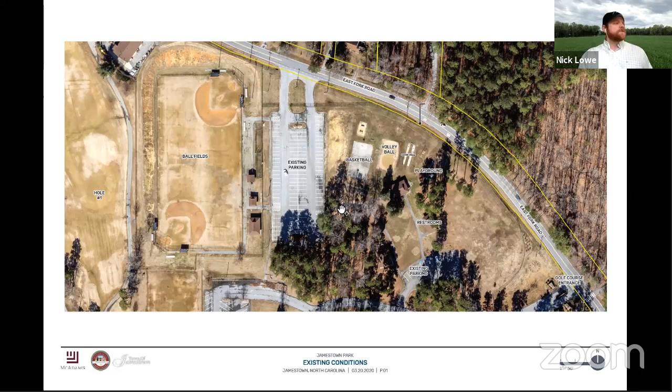Yep, okay good. So this is the existing Jamestown Park, to kind of orient you. Here's East Fork Road. Golf course is to the south. Maintenance is to the north. Hole 1 is to the west. And then the greenway is right here in the corner to the east.

So some of the things we took into account: we have really good existing parking areas for what's going on. Also there's some good open space, and next to the road here it's fenced, as well as some things to note when we start going through the plans - we have some pretty generous topography here where it's eroding and has become a maintenance problem, as Scott's told us.

We have the existing ball fields, existing parking, basketball and volleyball, playground, and then we have the shelter complex with restrooms and septic fields. So, taking into account what some of these natural features were, what's happening next to the park, and what the availability for sewer is, is really what drove a lot of the design.

And from talks with Matthew and Scott, if we wanted to do a splash pad or some type of new restrooms, our best availability for sewer is in this bottom left-hand corner of the site - the southwestern part of the site - if we wanted to connect and do something like that. So you'll see in both of our compositions that our splash pad is located here, just for the sole fact that it has to be near sewer if we decide to do a splash pad.

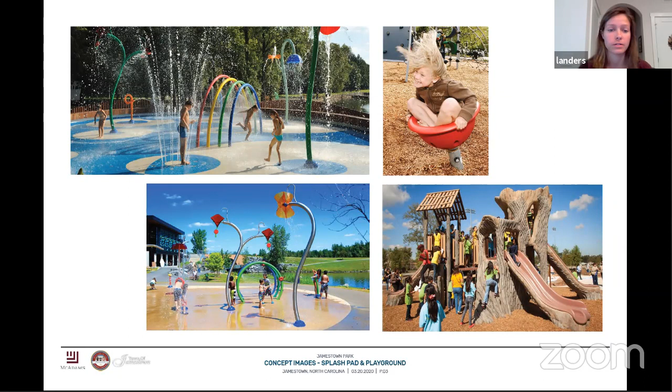So these are the concept images - splash pad and the playground, with some different ideas on furnishings that can be included in each one.

This is some examples of the natural play area adjacent to the playground, with different natural features kids can climb on and build with. It can be a pretty low-cost implementation depending on how much is already existing on the site or can be pulled from elsewhere on site. It also makes a lot of sense with that pine forest that's already there, so you can see that's the kind of setting a lot of these are in.

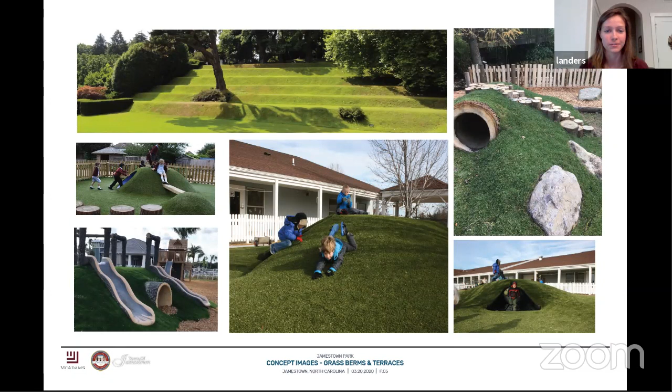These are examples of the grass terraces off of the big lawn area on the west side, and the landscape play berms, which can have tunnels and slides included or not. Kids like rolling down hills, so there are different levels of how advanced those can be. One other note is these can be synthetic or regular turf.

Depending on what they are, they can also be used by some of these new fitness groups that like to go out and do cardio, run up and down hills, and use these types of things for exercise. So they could be used for all different age levels, from kids up to adults wanting to train. Depending on how these are formed, they could be a really usable thing for all ages.

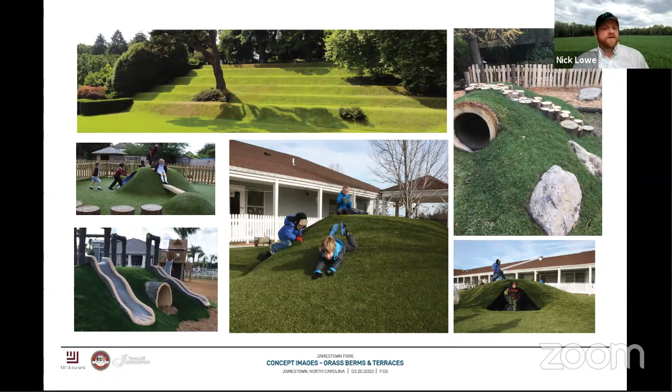So were there any more questions from the first concept before we move to the second?

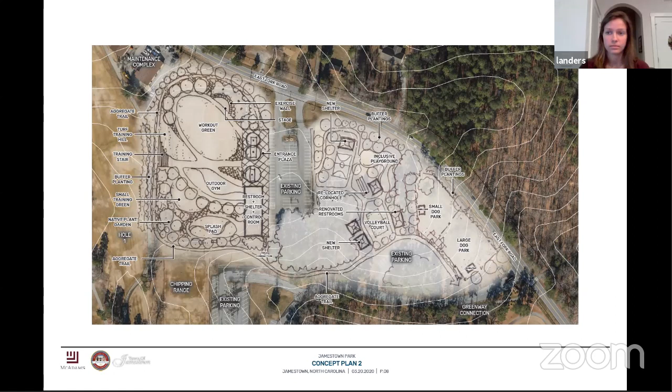Before you start this, if somebody does want to talk, I'm just going to keep everybody muted. If you want to talk, just unmute yourself and say you want to speak. Otherwise we're getting that nasty feedback. One other thing to note is if somebody's got YouTube pulled up and that's also playing in close proximity, you'll get that echoey back and forth. Good point, I was looking at it but I've got mine muted. Very good, thanks.

Moving into the second concept, the idea for the space where the ball fields are right now was to see how we could join together fitness into more of an open amphitheater like green. It wouldn't take the place of what's going on downtown, but it would have a different feel, more of a workout green.

Starting from the parking lot, you come into a plaza and you could pick which way you wanted to go. There's a natural path that goes around the top edge that surrounds the whole area, which could be really nice for walkers to walk through and around, creating a link back into the Greenway Trail, but also creating this nice little circuit.

So if you didn't want to get involved with all the activity that could be happening down here, it's also nice to walk on the periphery and see what's going on. I feel like that'd be something very important to the park for walking.

But you can also go straight up, and we'd have this idea of a training stair, which I'll show more pictures of later. Everyone from small soccer teams to these new fitness classes that do crazy cardio things wants some type of stair to run up or a turf training hill to roll a tire up or whatever. This could be conducive to groups wanting to do that kind of physical training, kind of like military training, which is catching on with a lot of groups.

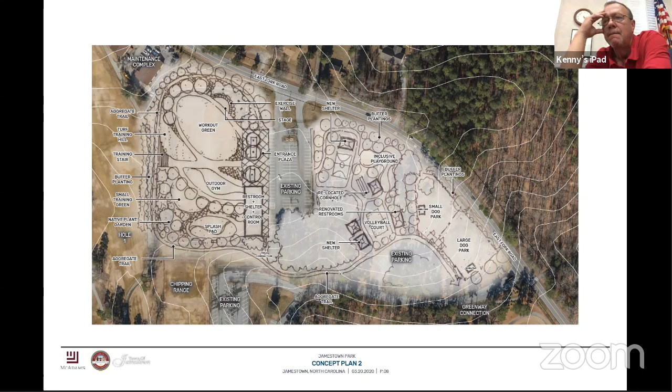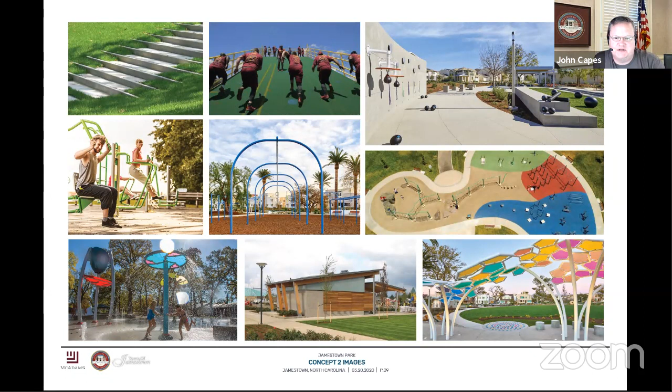One other thing comes to mind from a liability standpoint: what have other towns and municipalities done as it relates to things like this, besides the obvious skin knee or somebody falling off the monkey bars? Is there any mechanism in place that helps protect against potential liability issues with this type of advanced park equipment?

I know a lot of places will actually man a splash pad, so you actually have to get a wristband to be in there and check in and check out, and somebody is always there. I haven't gotten into the legalities with the paperwork of how they write it up for liability and insurance, but I could get you in contact with others. I know a lot of them have specific hours and rules, just like a pool, but they also have gated access to open and close it, which is a big part of the liability concern there.

That's just the litigious nature of where we are now. I was just curious. I completely understand that. I guess what I'm trying to say is this is the lesser hazardous version of a pool. This is where pools are going.

Nick, do you guys have a preference to one or two? Which one fits better the area that we have available? I honestly like both of them. It's just trying to figure out which activities, and that's one thing I would ask the group: give these a look and tell us which activities you think would be best for Jamestown. You all live there and have a pulse for what people would do. We're just responding to what we see on site, and we've fit things to topography and how that works, but we definitely look to your group, and of course Matthew and Scott, to tell us which items out of each would work best for us.

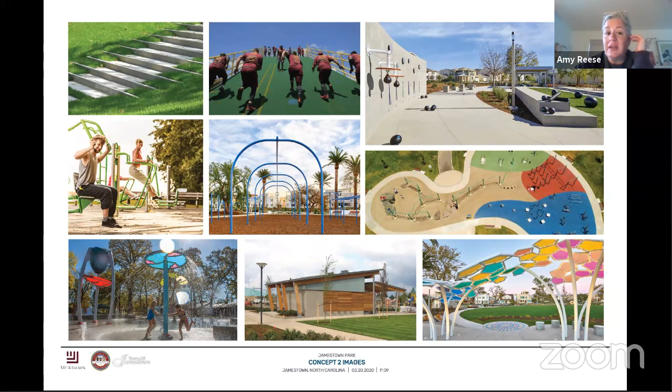So that's probably my favorite part of both the plans. I would be interested in knowing what the cost differential is between the two, and also what the liability cost differential would be. I would have no idea on liability costs because we never get into that, that's more of a governmental thing.

Just from first flush, the ones that are going to have more buildings and more play structures, I'd probably say number one would be more expensive, just because it has more involved structures, as well as it's got 2 playgrounds. So I would say one would be the more expensive of the two. Nick, one of the things we're gonna take away from this evening is we don't have to settle on one or the other. You can take components from each and mix and match, and meld it into one final plan. Most definitely, I think those make the best plans.

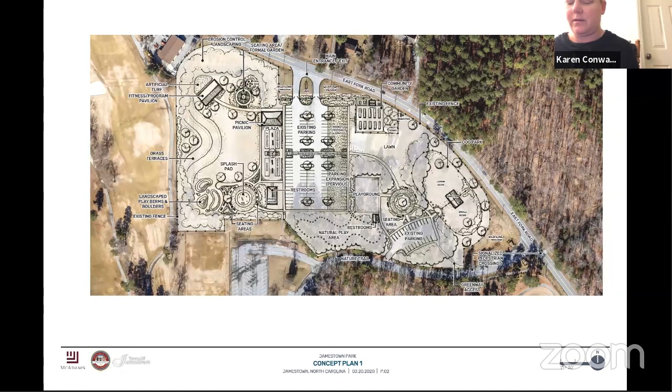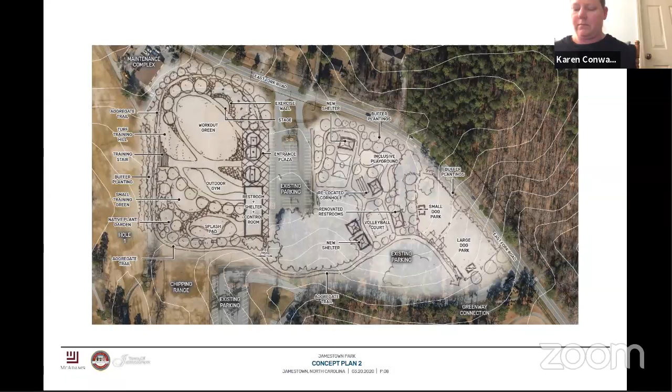I personally like the second one because, well I like both of them, but the feature of the basketball court on the second one, because I know that is well utilized in our current park. I could be wrong, but I like that they both have splash pads and dog parks. I know those were both high on the list, but I also know the basketball court is well used, and obviously the playground with the shelters. But that's my two cents.

I'm gonna let Scott jump in and tell you about the basketball courts, he can speak to that a little bit. Yeah, the basketball courts are probably one of the most used features out there of that park, no doubt, plus the walking access to the walking trail. We get a lot of dog walkers and people exercising who just park and hit the greenway. There's always a constant flow of traffic in that lot. So I think anything with the exercising and the walking trails, and of course the basketball, like I said, is super popular. All those features will be key.

Anybody else have some feedback for the group? It looks like the maintenance load will get a lot larger for Scott now, especially with the splash pads.

Dean, did you say that you felt like it was going to be... say that again, it kind of cut out on us a little bit.

Yeah, I'm sure this will all be thought through, but I'm just saying, especially with the addition of the splash pads, it looks like the maintenance will be a lot heavier load now for the maintenance man. It's a good point. I know Splash Pad got high marks on the survey, and the folks from McAdams will probably tell you they get really high marks everywhere they do these types of surveys.

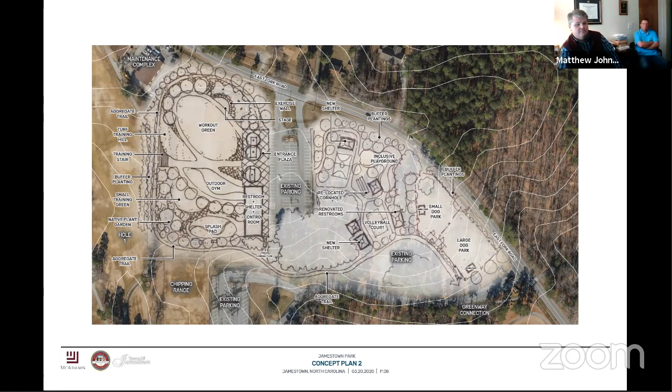And we definitely felt it was important to get kids involved, because we kind of all know how the communities are evolving, but seeing that there's an older population, we realize older populations want their grandkids there, so they need a place to take them.

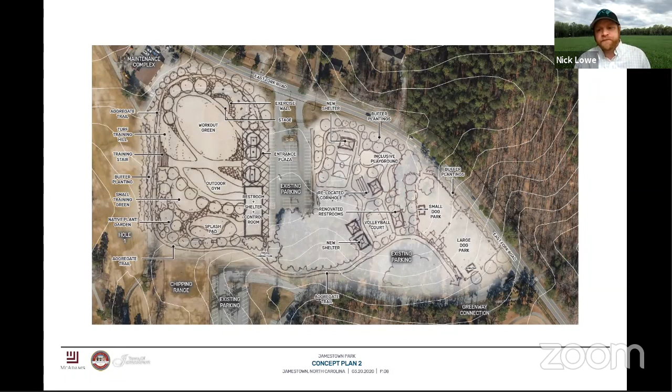Nick, what are the uses for the community gardens in the off season? That seems like a lot of space devoted to something that's very seasonal.

Yeah, in the off season you can use those. Gardens do need an off season, so you could probably compost them. But there are some winter things you can grow there if people wanted to do kale or potatoes or things like that. But yeah, there would be an off season with that, unless we wanted to do some winter varieties of things there. But that's a good point, that's a space that might not be used in the off season.

I've got one more question, and this just never occurred to me to ask. What is the acreage of this entire area? Any idea? If you don't, it's fine. We've never taken a boundary of it. We've gotten the acreage of like the whole golf course.

Let me jump into something real quick. Yeah, actually, I don't want to derail. Somewhere, I don't want to derail you. It was just something that popped in my head, and I was kind of curious about it. We've got it somewhere, I can get it for you. That's fine, that's fine, no worries.

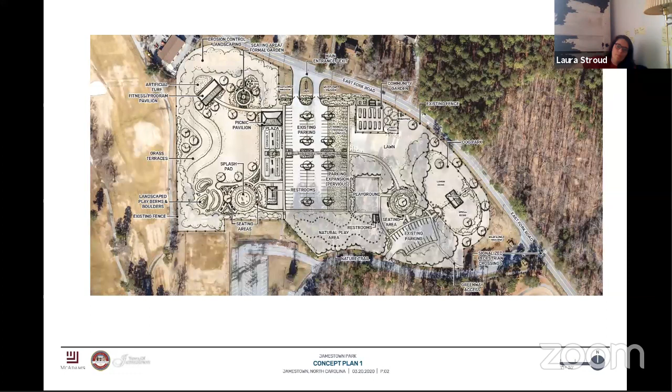This is Laura with McAdams. If my memory serves me, it's between 7 and 8 acres. Nick, if you want to keep moving along with the presentation, I can see if I can find that for us. I think we've got it on the inventory analysis of the parks, we've got an acreage on there. That's in the master plan. Again, I don't want to derail you, I was just thinking about something.

And that's one good comment, we feel like we're getting a lot of bang for the buck, but also if you did take some of these elements out and phased it out to find a budget we could do, that's why we're looking to you all to tell us what's the most important thing that needs to happen here, so that when we start recrafting something we can go look for a PARTF grant to meet a certain budget, we can make sure those things are there. And if there's something like say the splash pad that's just too much to bite off, we can leave that blank in this one and just leave the space for it. So we're kind of looking to you all for guidance to help us get a plan that we'll see built.

To put it bluntly, I just did it very quickly in GIS, very rough, it's around 10 acres. Thank you, sir.

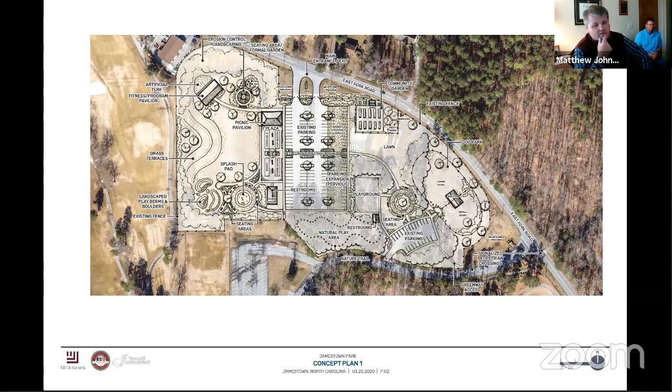Sure, so I don't know the answer to that - that's the easiest solution. There's a lot of contentious feelings around the development of the Johnson property, no relation. It would be approximately at the corner of Guilford College and Mackay Road. Nick, I don't know if you have access to your sketch - you can probably throw that up. We don't know if that will come to fruition or not; that depends on a lot of different factors. But there's the general layout.

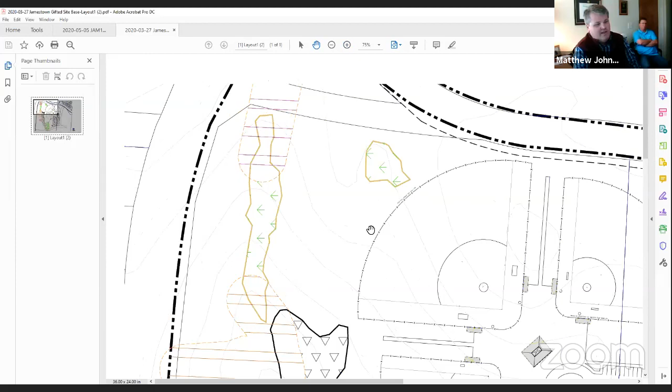The subdivision just to the north there, that's Jordan Creek, just to give you a reference off of Mackay Road. Taking their road network out of CAD, Nick came up with a baseball triplex here, showing the three different fields. They would build all of this for us turnkey, and hand that over to the town for continued maintenance in the future.

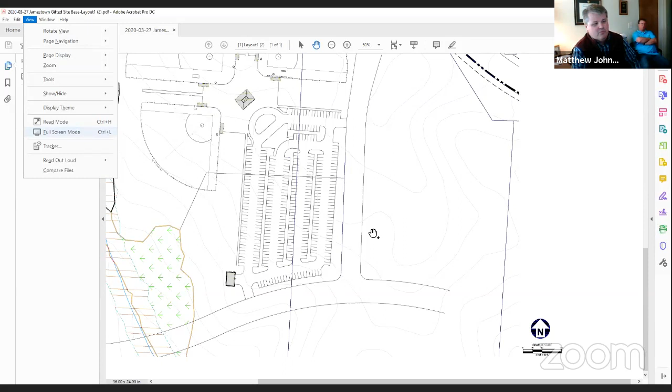But they would have their own amenity, to the southeast of the parking lot, on an adjacent piece of property where they would have a neighborhood pool and that kind of stuff. So they would utilize both the parking lot - so we don't have a sea of asphalt - for both the events at the baseball fields as well as their own internal amenities. We've talked about having a small playground just to the left, in the open areas south of the baseball fields. There's a number of things we can do out there. This would be something they'd build for us to our specs and then turn over to us for ongoing maintenance.

I couldn't tell you when that's gonna happen though. Okay, so it sounds like right now it's kind of up in the air, and as of this point, we will not be having baseball fields unless something moves forward with this design and this location.

Well, here's the thing: the baseball fields that we have are still there, until such time that we would be able to get a grant, or a number of grants, to help us develop the property where the baseball fields are now. So this certainly won't happen overnight. The best plan would be that these would open in conjunction with, or in a similar time frame as, we decide to move forward with some sort of plan on the other baseball fields. It just takes a tremendous amount of time to get all that money together, and we didn't know the coronavirus thing was going to happen. Who knows what next year will bring, but we're going to try.

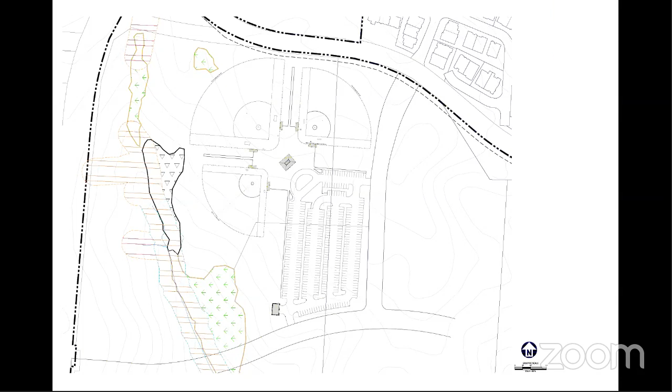Okay, yep, I just need to know. Thank you so much. Sure, absolutely. So Matt, just to clarify - everything we're talking about, including this, is a span of years. There's nothing that's going to happen quickly. It's going to move, literally, at the speed of government.

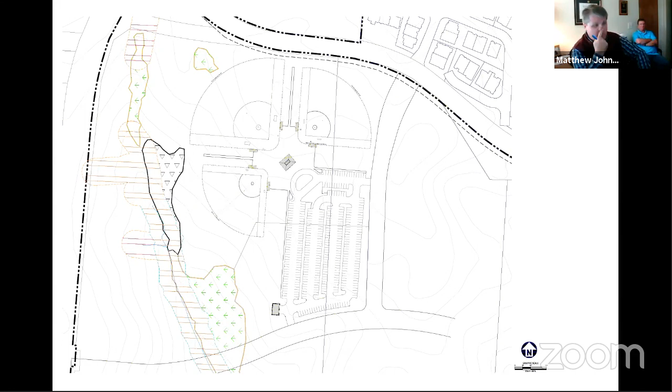Exactly, we would like to get grant money to do this - taking the different components you've seen in these two plans and melding them into one. Just applying for the grant takes a tremendous amount of time and effort on the part of staff. We may not be successful in the first round; it may take additional rounds, it may take phasing to get us to the end of the concept. Wrenn Miller Park was an example - it was a fairly small park, not a lot of major components, so it fit very nicely into the PARTF grant funding process.

We've gotten PARTF grant funds in the past, so that may knock us down a notch - it's been a few years, but they try to be equitable by spreading that throughout the state. So I wouldn't necessarily rely solely upon grant funding, but there may be some discussions on how we fund this going forward once we get the plans done. Part of Nick and Laura's job will be to come up with a list of costs that'll go along with this, and that'll help us as we talk about our capital improvements program, the CIP, with council going forward. This is probably going to be, at minimum, a 3 to 5 year window for us to work on getting some funding for this.

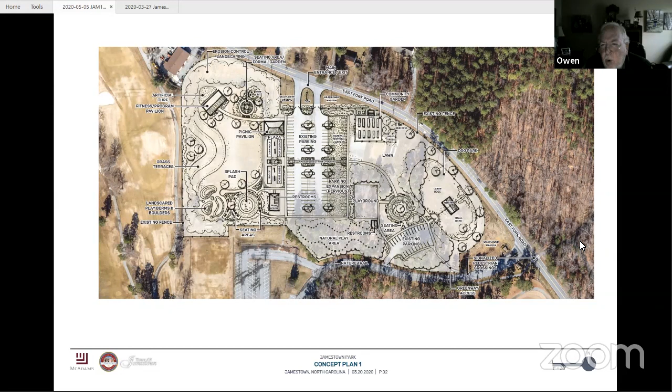Nick, not to dwell on it, but the seasonality of the community gardens and the splash pads - those two particular things don't seem to cover much more than the summer months. I like the second one because it's more useful for the entire year, especially with the basketball court up there. That's a good call out.

So would it be safe to say it seems like the consensus from what we're hearing is let's move away from the splash pad on the concept sketch for now?

Agree. Okay. Nick, I'm going to jump in and say that I really like the idea of the fitness program pavilion with its inside-outside concept, where you can roll the doors up if the weather's nice or roll them down if it's not. I think that's something we've heard a lot of people say, especially seniors who'd like a place to do fitness activities. It takes advantage of both the inside and outside spaces very well. Roll the doors down and you can use it all winter.

Nick and Matt, I think you're right in terms of reaching out to other people to see what they think. Knowing our grandchildren the way I do, nothing will be more important to them than the splash pads, and they won't be limited to 3 months. Youngsters like cold water for whatever reason, or they're not threatened by it. But having said that, they're not Jamestown taxpayers, they're High Point, so maybe we don't care so much about that. We've seen ranges where a splash pad opens late May and goes to early September.

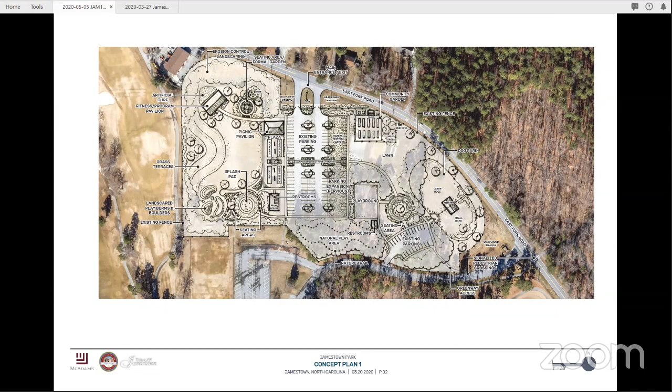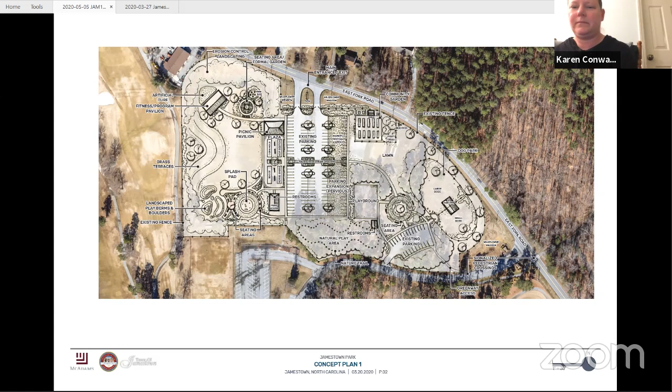No complaints. Yeah, I think it's great. I think you guys have done a fantastic job incorporating lots of different things in there too. I just appreciate what you guys have done. I think you've done a great job. Thank y'all very much, definitely appreciate it.